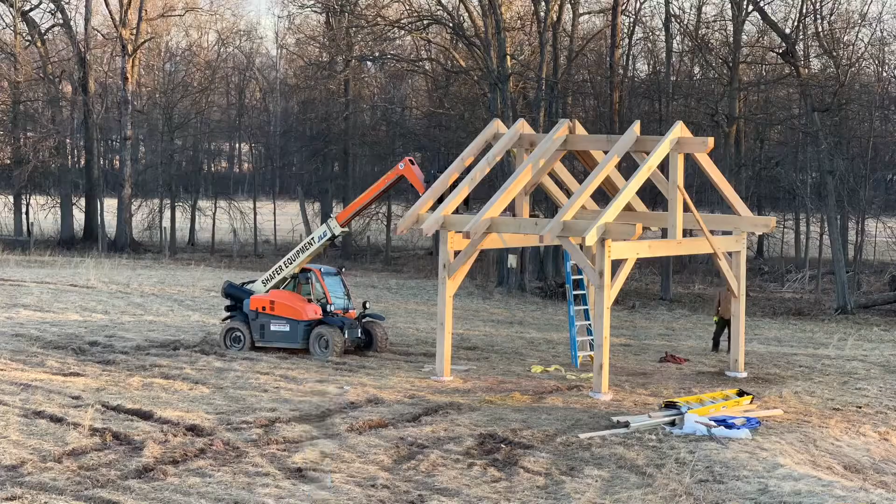You may have seen my last video about the timber frame pavilion in Pennsylvania and thought to yourself, wow, that's pretty cool, that's going to be pretty hard to top. Well, I think I've picked out a project that might do exactly that. You're not going to want to miss this one.

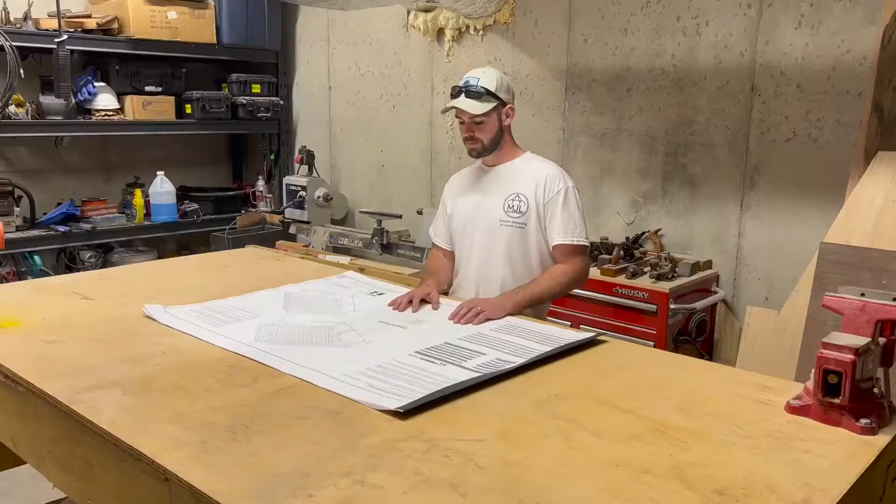So the big project we're going to be tackling next is a timber frame workshop, 26 by 30. We're going to cut and mill our own poplar here on the property. It's a large property and there's quite a bit of poplar around the edge of a field that I'll point out to you. I had this field on top of this hill forestry mulched. This was a much larger field back in the day and just grew up because nobody was maintaining it. So now it's a field again, but there's still lots of poplars on the edge. We're going to try and kill two birds with one stone here: mill these poplars up for the shop and widen the field a little bit.

Alrighty, so here's the proposed build site. I got it staked out here, you can see with the yellow flags. We're right on the edge of a horse field, and there's a stream down there and another field. Pretty good access to the drive, and we'll just put a gravel road, gravel pad right here. We'll have some animals over there, so we can connect it all up right through the fencing here, and it should be really nice.

So what I'd like to do is mill that poplar, expand the field, and do something with the resources there, and build this workshop. 26 by 30, it's got an aisle and a center bay. The purpose of this workshop is staging for the farm equipment and for the animals that we want to have over on the farm proper, as well as an actual timber frame workshop for a business that I'm starting to grow. I've got a few customers in the works for small timber frame projects here and there, and I need a place to be able to do that.

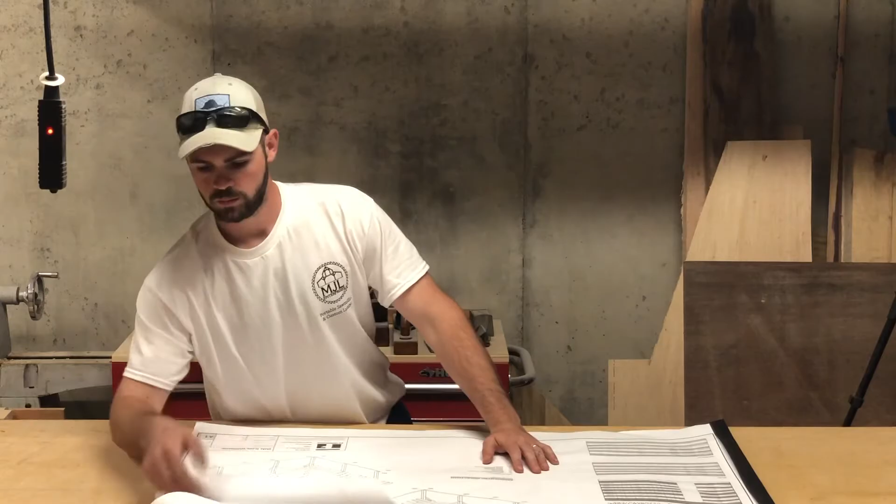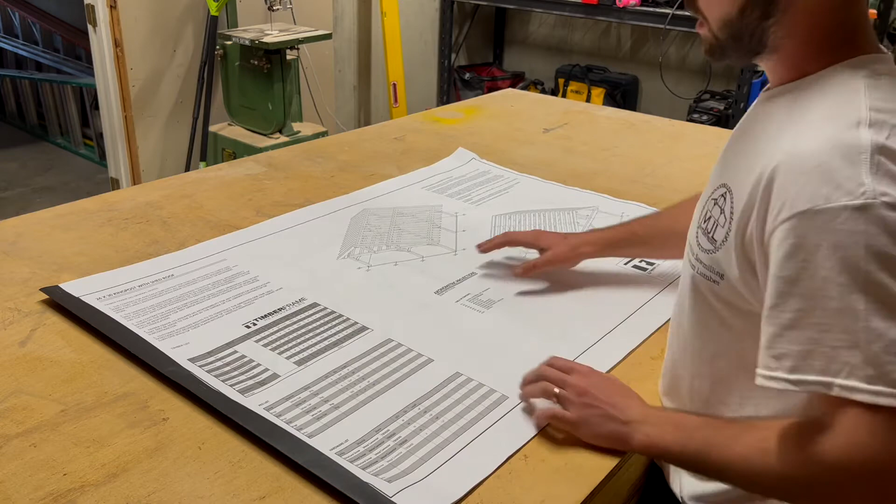26 by 30, we've got 9 posts. It's a king post style, but it's got this elongated roof, double roof pitch, and it's got the loft, which I really like. With these plans, a couple things to consider: 5,345 board feet. The pavilion we did was about 2,000 board feet, so this is almost 3 times the amount. However, a lot of that board footage is actually in the rafter section, which we might tone down a little bit, because this is a lot of rafters. I think they're on like 18-inch spacing, which is a little bit overkill, especially considering they're 4x8s.

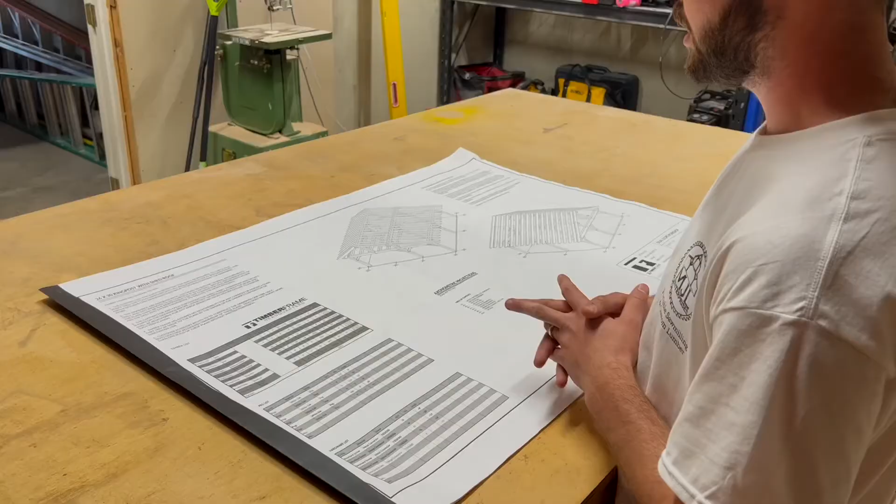Now, the other thing is that this is poplar and not oak. When we did that oak, everything was more difficult because it's very heavy - heavy to cut and transport to the mill, heavy to rotate, and you have to choose very large trees to get those huge timbers we needed. With poplar, it's much lighter, much easier to cut, my blades will last longer. That's a different animal entirely, so I'm excited to be doing this out of poplar, and poplar is a very abundant resource on this property. So we'll be putting it to good use.

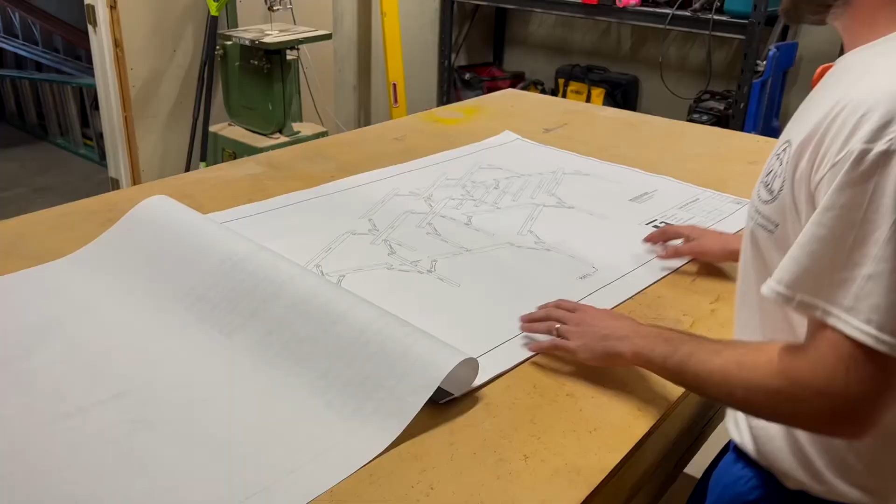Now I really like these exploded drawings here. You can see, without the rafter section, all the tie beams and plates, sort of the general flow, how all the joinery fits together. This will be the slab plan.

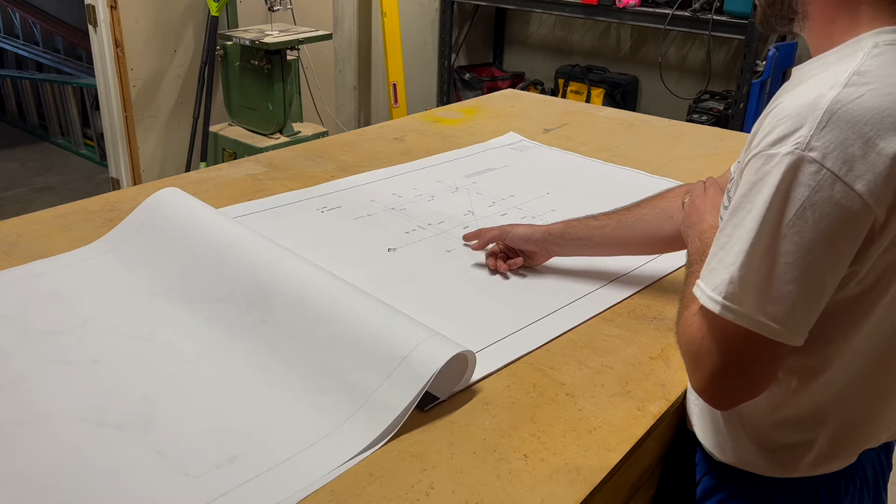So the architects have it set up for a 3.5-inch setback from the edge of the slab, and I guess that would be for a 2x4 framed wall. So we're probably going to do something very similar to that.

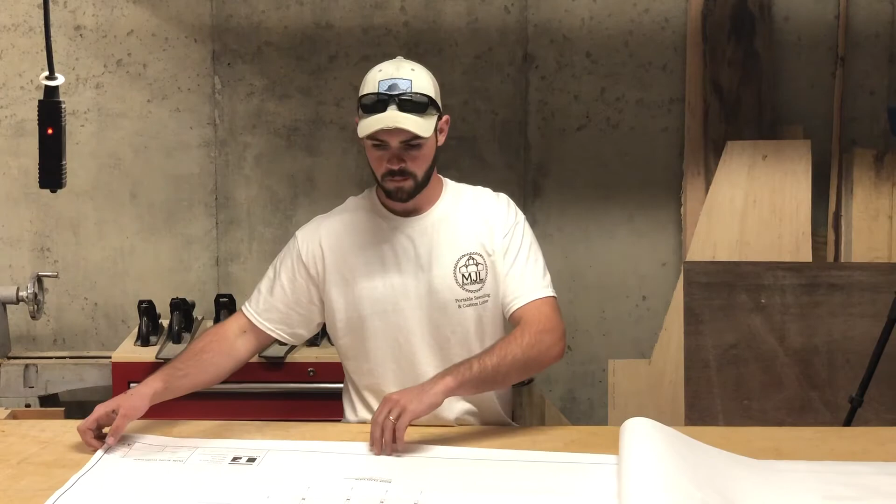Here's the rafter section. So spacing was 1 foot 9 inches, so 21-inch spacing. Might be able to adjust that.

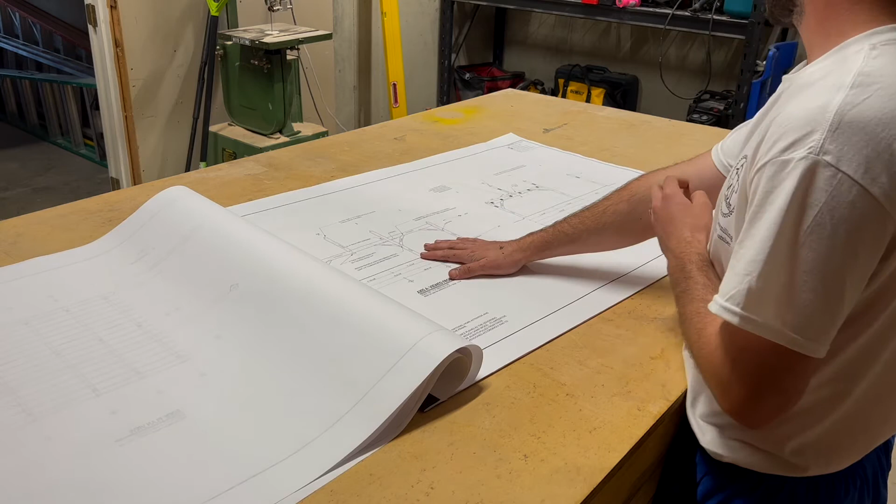Now, this particular plan does not have piece drawings, so you're supposed to be able to do all the building and all the cutting from just the architectural drawings alone. So that's going to be a new challenge, which I'm interested in taking on.

This page is pretty neat. Shows you the scarf joinery on the plates and the spline joinery on the tie beams.

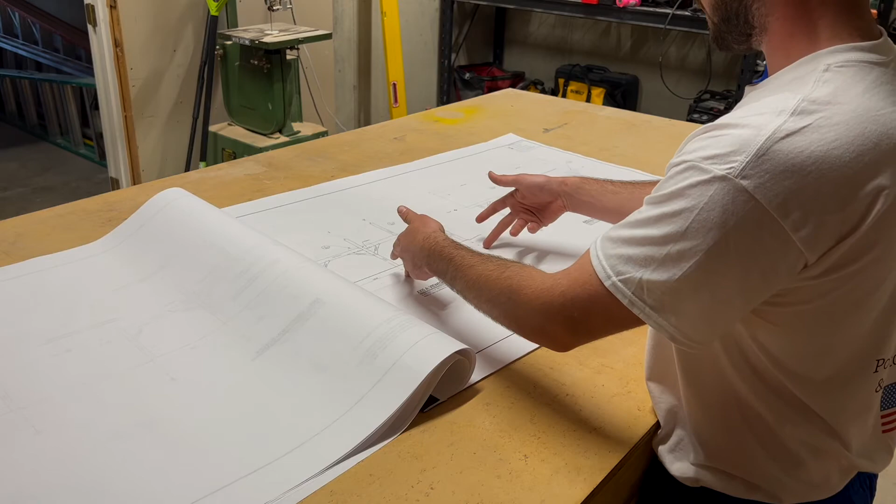I really like the size of this opening. This opening is 15 feet, 8.5 inches wide. And then you have a 10-foot aisle. So I can put the sawmill in the aisle, or I can put spare timbers in the aisle.

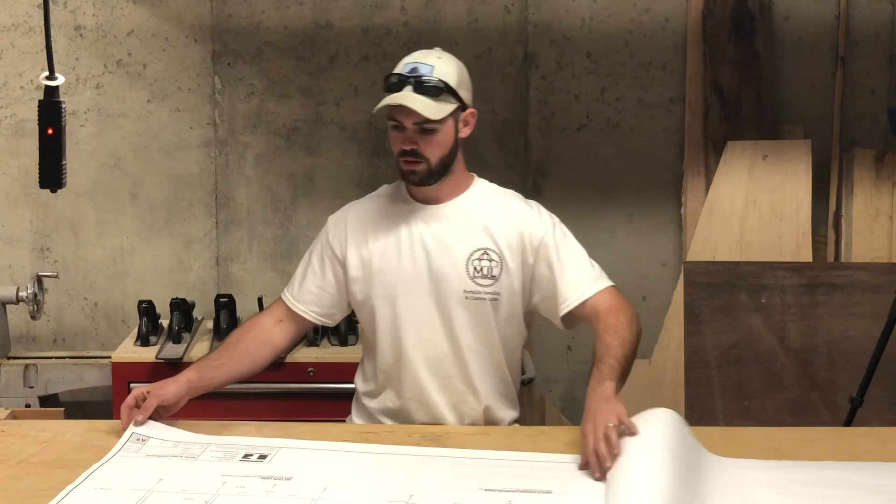Here's the king post structure, and here's a little more detail, cross-section view of the king post arrangement. And then you've got a few details here at the end which are supposed to flesh out that special joinery - for example, the through tenon, which is going to look really neat, the spline detail, and the scarf joinery.

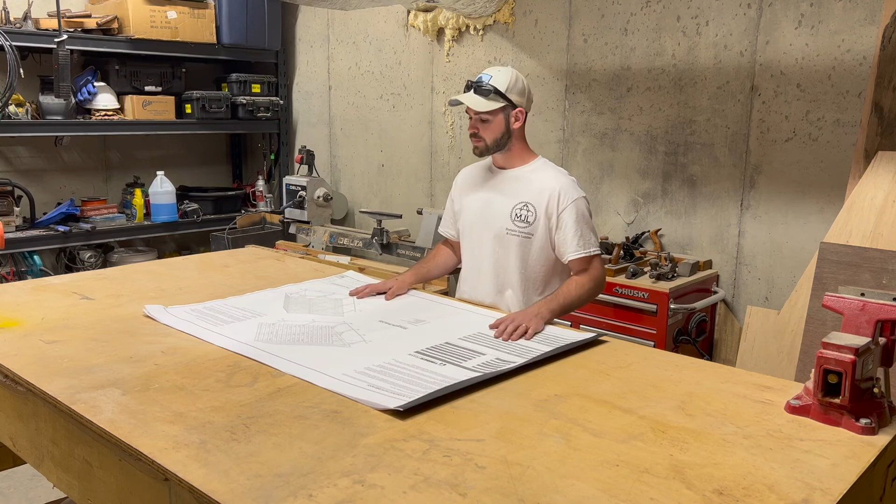I'm going to do a multi-part series in which I go through cutting down the trees, milling all the lumber according to the timber list that's provided, cutting all the joinery, the slab pour, the raising, everything. So it's going to be a really exciting project, and I'd like to bring you along for the whole thing.